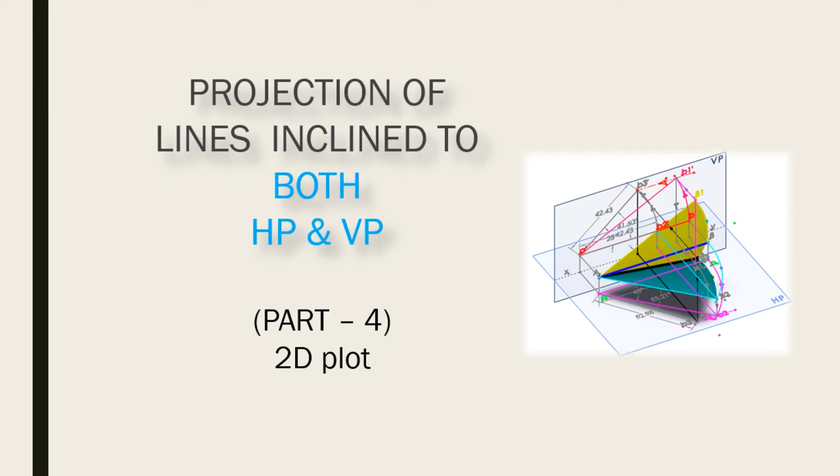Graphic projection of lines. This is the fourth part, line inclined to both the planes. Here we will be showing you the two-dimensional drawing in three-dimensional environment.

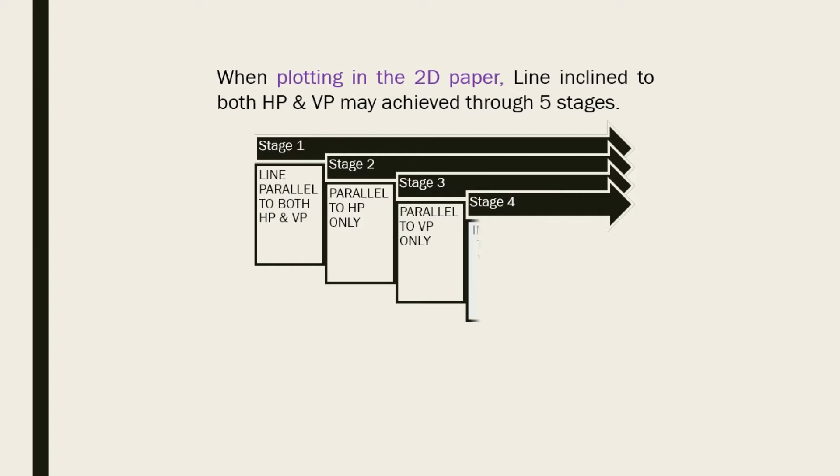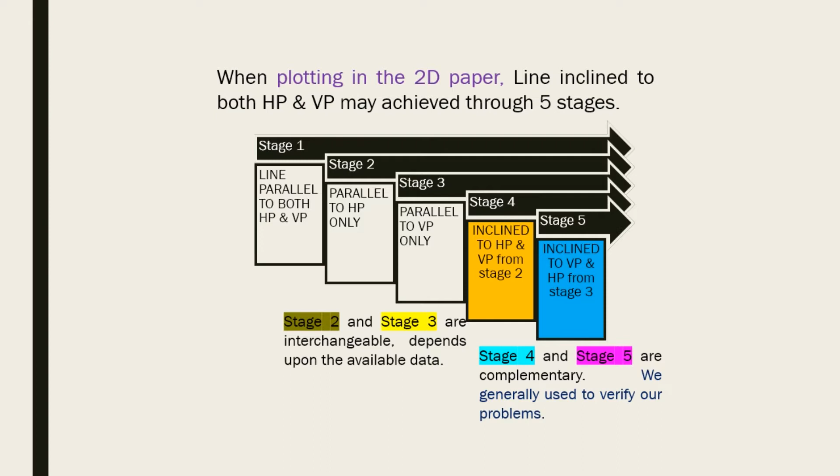So it can be done in 5 stages, starting from parallel to both, then parallel to HP only, and VP only, then inclined to both HP VP or VP HP. Actually 2 and 3 can be drawn directly. 4th and 5th are complementary, that is any one is completed, we can have enough data. 5th one is generally used to verify our problems.

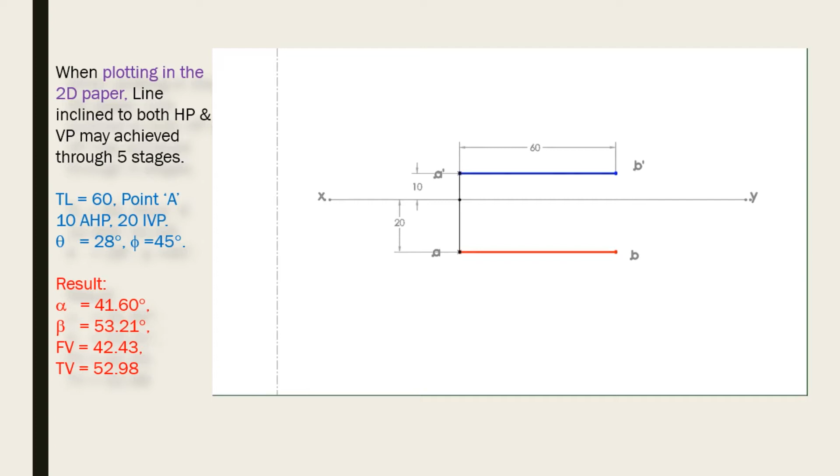So let us start with a line parallel to both the planes, and in 2-dimensional, first the point A will be plotted, that is A dash and A. Applying rule number 1 because it has to be perpendicular to XY line, and the line is parallel to both the planes. Plan and elevation both are parallel and equal to true length, and B dash B can be located.

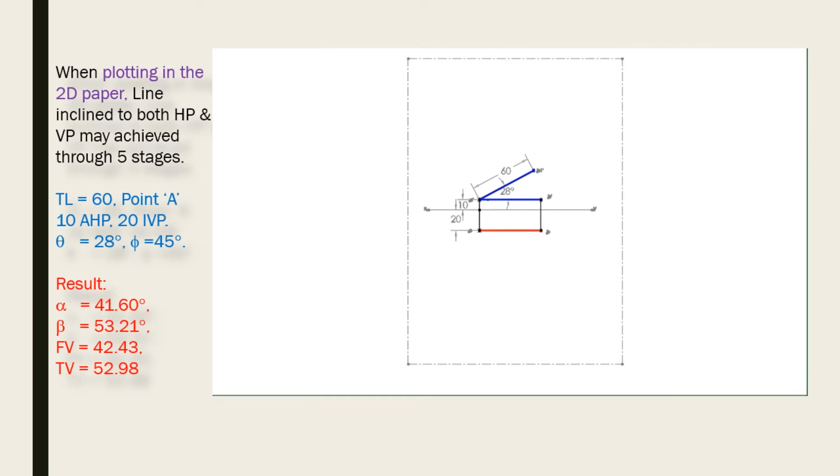Now next we will draw line inclined only to HP. So true inclination is visible in the front view, and true front view is equal to true length, and the corresponding inclination of 28 degrees is drawn, and its corresponding projection will be A dash B1 dash, and A B1. So A B1 will be parallel to XY as per rule number 3, so it can be drawn.

So both get intersected, that is the point B1. A B1 is a line inclined to HP only. So this is drawn as a second layer, but generally in the paper it will look like this. So we have enough data to draw directly inclination to HP, so we can remove a line parallel to both the planes for clarity.

Likewise, now we will be drawing a line inclined only to VP. Same procedure, and it is visualized in another layer. Inclination, true length in the plan, corresponding projection in the elevation. So whenever you see these type of diagram, actually it is overlapping of 3 or 2 diagrams. Parallel to both the planes is removed, so it's overlapping of 2 diagrams. 2 stages of lines are drawn, inclined to HP only and inclined to VP only.

Now we can reach a line inclined to both the planes from B2 dash, that means inclined to VP first, then we are making it inclined to HP. So inclined to VP, projection is B2 dash, we are reaching the B3 dash.

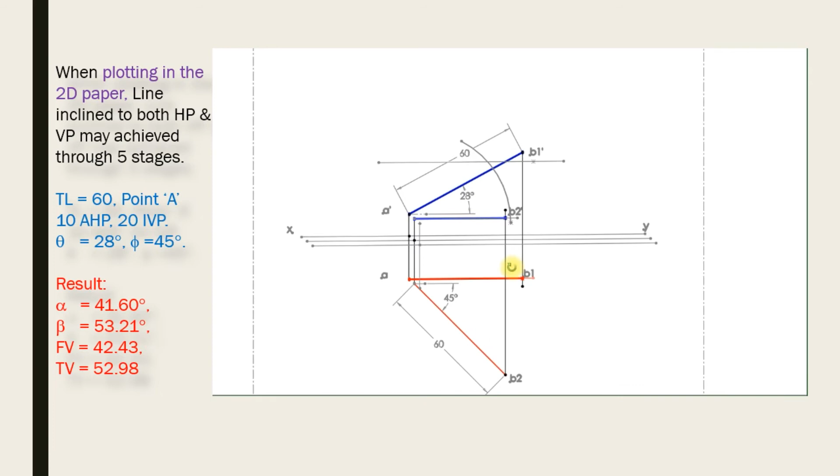So now where to stop this line is nothing but the locus or the boundary plane which we have mentioned, because capital B3, the other end point of a line inclined to both the planes, with fixed point A, will have the same coordinate whether you are reaching by B2 to B3 or B1 to B3. And this locus B1 dash to B3 dash is nothing but the boundary plane, which can be calculated provided you draw a line A dash to B1 dash.

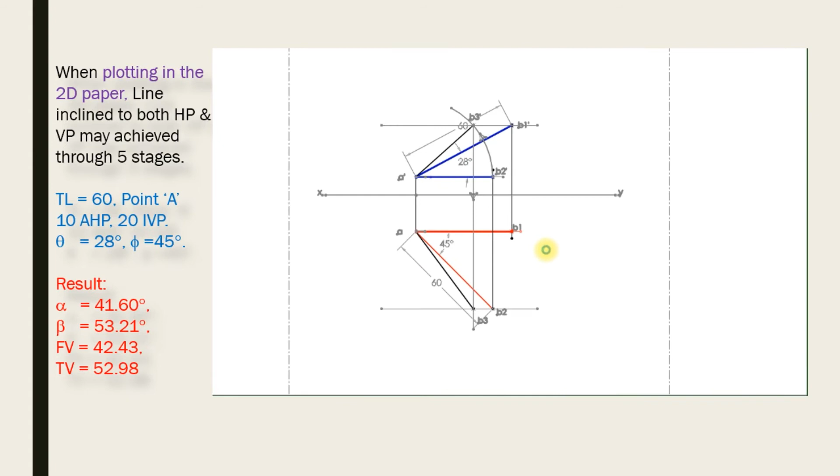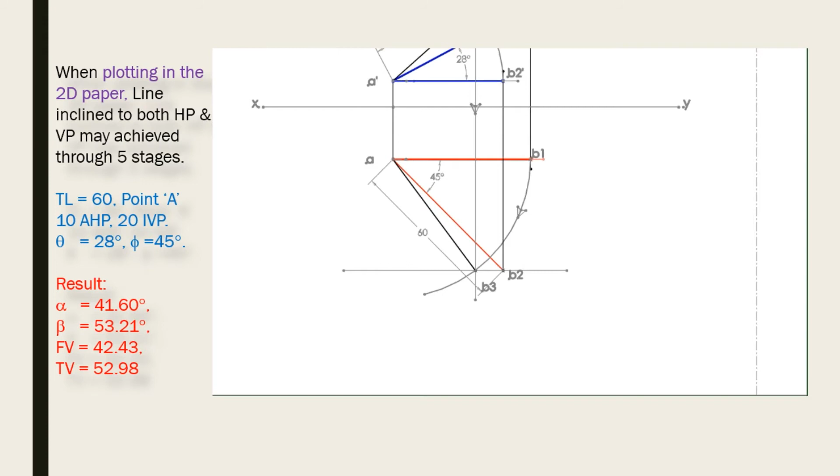That's why even if we are going by B2 dash to B3 dash, to find where to stop this B3 dash, we need the boundary plane height or the locus line B1 dash to B3 dash. That's why we should draw two stages independently, and it is mandatory to find the B3 dash, because we are rotating A dash B2 dash, which is actually not a true length, it's a projected length. If it were a true length, we could give true inclination, but it is a projected length, so we don't know where to stop. That can only be achieved if you know the locus B1 dash to B3 dash, which is the boundary plane.

Same way we need locus in the other direction when you go from B1 to B3. So once B3 dash is achieved, we can draw B3 also. B3 dash is known, B3 will be in a straight line which is perpendicular to xy, and easily you can locate it. With that we can complete the problem.

But B2 to B3, that means line inclined to HP, then VP, also can be drawn in the same way provided you know the other locus or other boundary plane. So it is a complementary one. You can start from B1 to B3 or B2 to B3. You can find enough data. Any one can be drawn, but generally the other method is drawn, and the problem can be verified whether we have done it correctly or not.

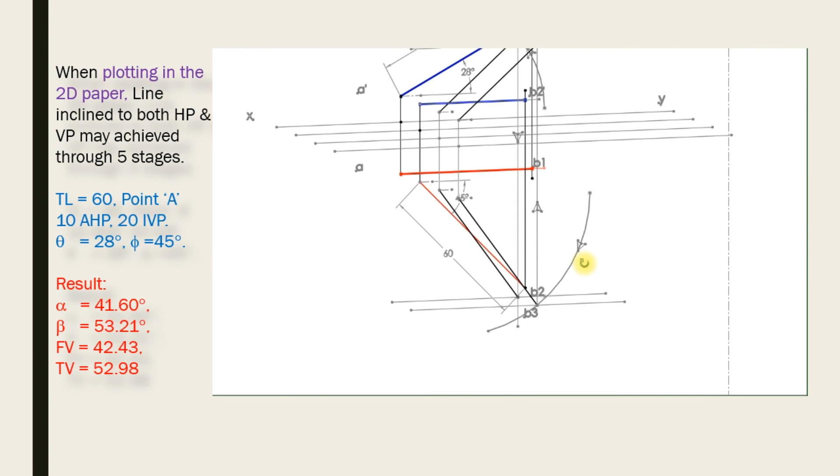So this is the way. B2 to B3 problem is over. But B1 to B3 also, if you draw, it has to exactly intersect with the B3, because B3 is deduced from B3 dash as a projector. B1, B2 to B3, we are moving in an arc-like manner. At that time also it has to intersect with the B3 which was deduced from B3 dash.

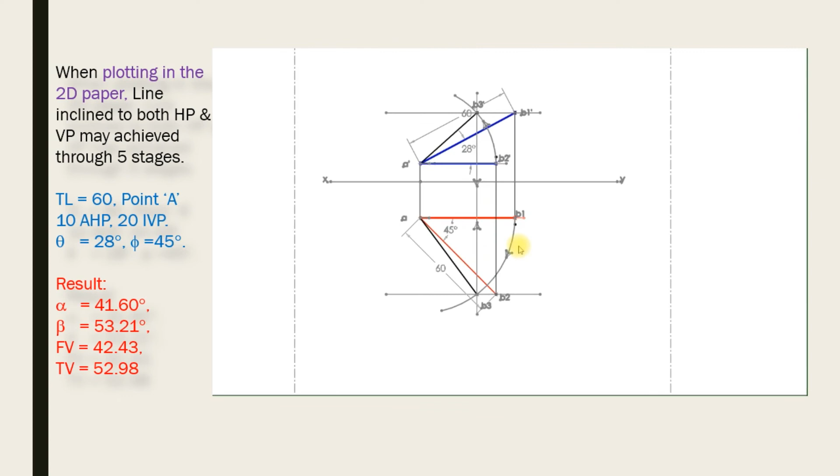The other way also we can do it. From B1 to B3, first complete it, find the B3 dash, and if you draw an arc from B2 dash to B3 dash, at that time also it has to intersect accurately, so that we have done it correctly. So this is the projection of line inclined to both the planes we draw in a paper, which can be visualized as minimum of 5 layers.

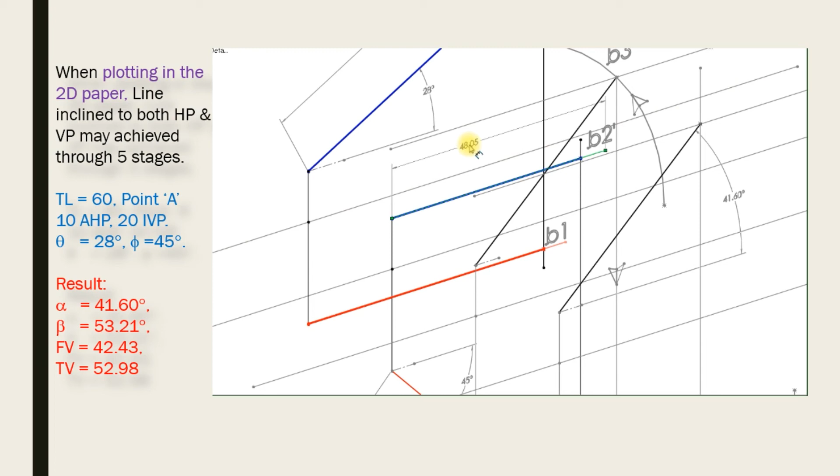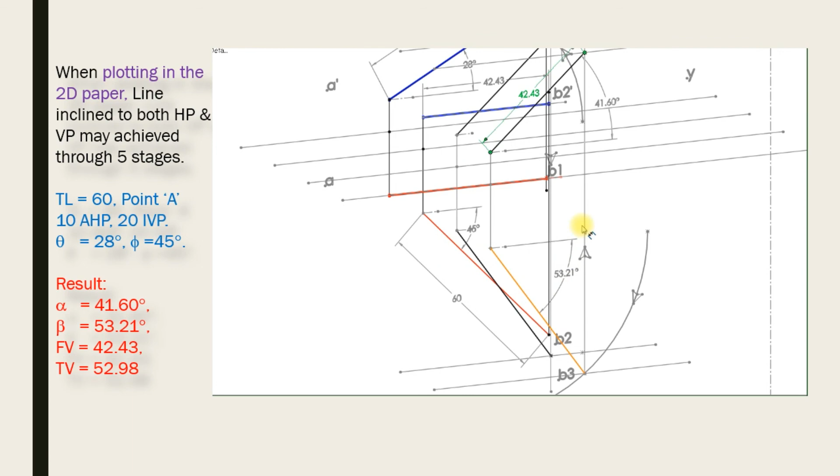Now you see A dash B2 dash is equivalent to A dash B3 dash. A dash B2 dash is a projected length when the line is inclined to VP. You see, same length. So it gives the relation between the stage when it is inclined to one plane and when inclined to both the planes. Inclined to one plane is A dash B2 dash. Inclined to both the planes is A dash B3 dash. Both times the length of the line is same.

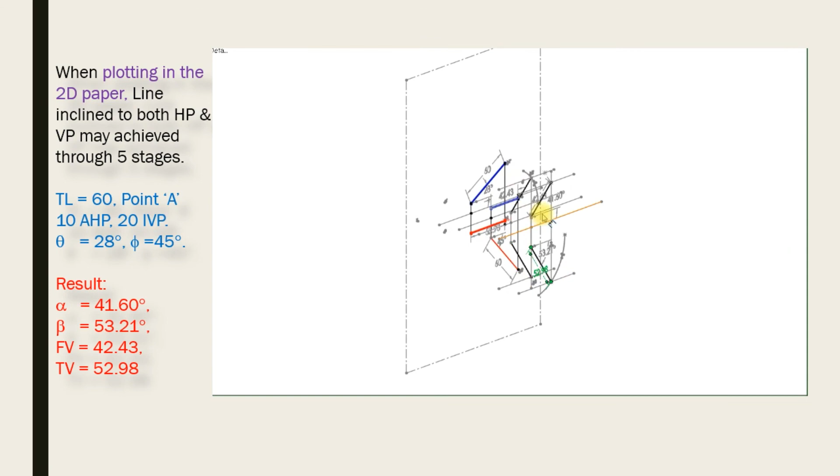When it is inclined to one plane, one projection is parallel, but when inclined to both the planes, front view and top view both are inclined to xy. If it is inclined to any one of the planes, one of the projections will be parallel. Same way it can be visualized for other projection also.

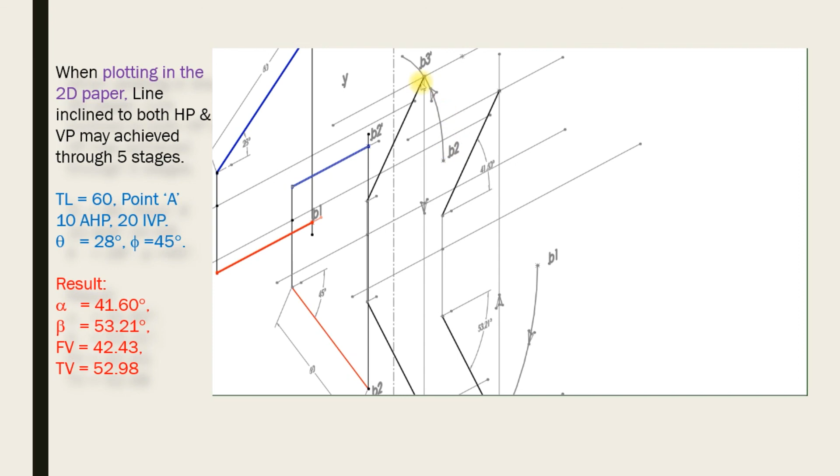So this is alpha, apparent angle, and this is beta, another apparent angle. The final front view makes inclination with xy of alpha, and the final top view makes inclination with xy of beta. Both are called apparent angles. It is available only in the paper, not in the space.